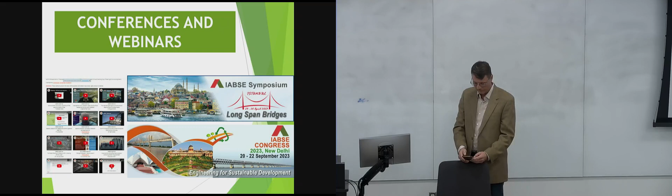We also have, as the US group, some activities planned for that event. There are a lot of technical commissions, 40 task groups, covering performance and requirements, conceptual design, structural analysis, construction methods, existing structures, and sustainability. The association started around bridges. In fact, it's called the International Association for Bridge and Structural Engineering, but it also covers a lot of aspects related to structures which are not just bridges.

These are examples of reports that those commissions produce. So basically each committee has the objective to produce something which is going to be useful for the profession and the research community.

So the Young Engineers Committee is probably what you guys are more interested in. Basically, the good thing is that you have a student membership. You have free online access to the journal, which is very good because the Structural Engineering International Journal is a mix of research and actual practice. So there are good projects actually to go through.

There are monthly newsletters, and the good thing is that you are part of a network, so the platform is pretty good and allows you to connect with other international colleagues. Sometimes you are assigned mentors, and these mentors could be fellows, experienced or seasoned members who help guide you through your career. So this is quite a good program.

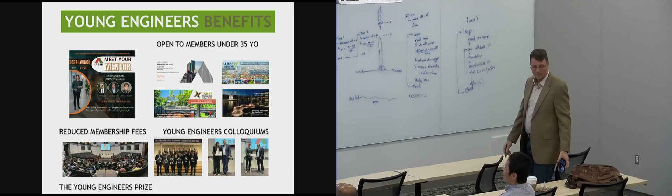You have to be under 35 to be eligible. Most of you probably are eligible for this. Otherwise, you will go into the general category membership type. Sorry, I'm not very good with Microsoft.

These are examples of activities. I think you have to think about that sooner or later, when you start your career professionally, about what are good associations for you. Obviously there are a lot of American associations, but this one has the peculiarity of allowing you to connect outside of the US, because it is an international association, though the headquarters started in Europe, in Switzerland.

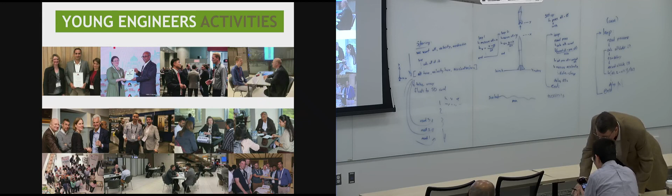IABSE in the US - this is the board of directors. The chair is Maria Grazia, who is Italian. You will see there are more Italians than Americans in the board of directors. I don't know why.

We are actually meeting, and they drag me in as well. We meet monthly and try to organize activities, webinars like this, in order to keep connection with the profession, but also with universities.

These are the activities - usually we also have a national group conference, which is one day, and we also try to organize a very good site visit to a particular bridge under construction. As I said, we also provide a quarterly newsletter. I think this is pretty much about IABSE.

So please have a look at the website. Feel free to email me if you need any information. One of the things I wanted to do as a member is have more activities where we, as an association, go into the universities and try to stimulate the next generation of engineers to be part of the association.

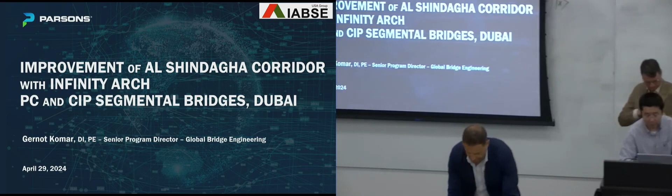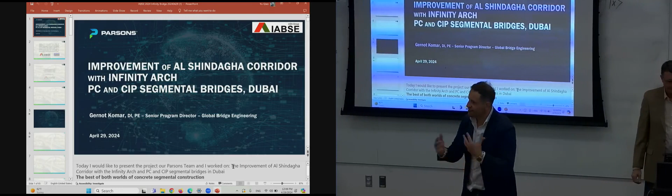Gernot is also a very good soccer player, by the way. Thank you. So we haven't talked about Italy and Austria. We had several recent matches that went well for Austria and well for Italy as well. But yeah, normally we lose against Italy. No, but last time you won. So we always look back just to the last game.

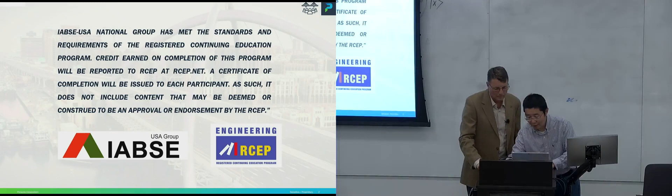All right, I think at home or on Zoom they can see the overview, not the presentation mode. Let's see if this works. I hope it works this time. If not, I apologize for the inconvenience because you can also see the small screen. Actually this is the broadcasting screen. For some reason, let me see if I can move this a little bit. No, I can't, for some reason. It's fine, if you want to hide it you have to go to non-content. Let me move this further over, then it doesn't matter. Maybe I need this so they can see it. No, at home they cannot see this one because they also see the frame. Okay, now I'll move this side, hopefully they can only see this. I don't think so, can you move it back? You guys here are fine, but it's just for the people on Zoom. Doing the hybrid always creates challenges, so sorry, be patient. We don't need to see the screen, do we? Oh, you mean this one? Yeah. This one's always there. Okay, sorry about that. No worries.

Good afternoon, everyone. Today I want to talk about the improvement of the Al-Shindagha corridor with the Infinity Arch, with precast and cast-in-place segmental bridge in Dubai. I say this is the best of both worlds of segmental bridges in concrete—we have precasting and cast-in-place.

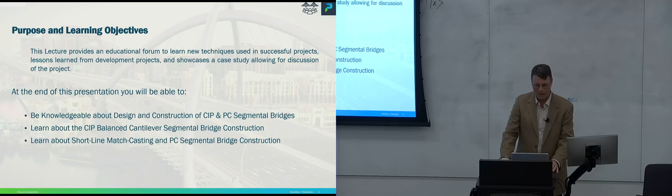Here are the necessary slides to get the PDHs. I will skip this copyright material. Purpose and learning objectives: at the end of this presentation, you will be knowledgeable about the design and construction of cast-in-place and precast segmental bridges. Learn about cast-in-place balanced cantilever segmental bridge construction, and learn about short line match casting and precast segmental bridge construction.

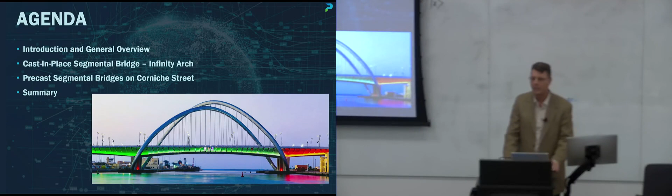The agenda for today: first I will give an introduction and general overview. Then I talk about the cast-in-place segmental bridge, the Infinity Arch. Then the precast segmental bridge, bridges on Corniche Street, and a summary. First, the introduction and general overview.

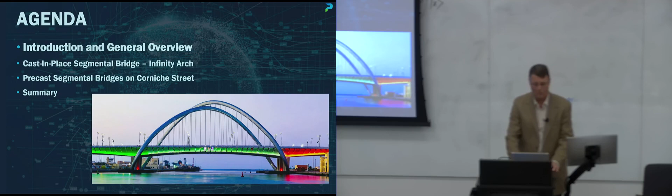Dubai is an amazing place, changing every day almost. You see the project location. It has the Palm Islands, the World Islands, and numerous Guinness Book records, like the tallest building, the Burj Khalifa, over 825 meters, more than 2,000 feet. It has the largest indoor mall, and within the mall the largest aquarium, the largest and longest ski slope, and also the fastest police cars with over 250 miles per hour—that's a Bugatti.

I will zoom in on the project location and talk about the cast-in-place segmental bridges with the Infinity Arch over the Dubai Creek, and then about the 21 precast segmental bridges on Corniche Street.

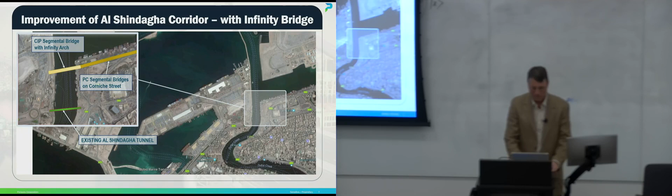Here's a general layout of the improvement project: the cast-in-place segmental bridge on the southwest side with the Infinity Arch, and the 21 precast segmental bridges over Corniche Street.

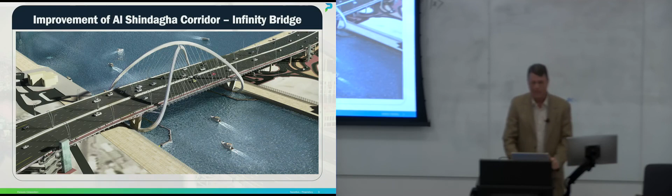The rendering shows the Infinity Arch Bridge, and I want to point out the pedestrian walkway on the south side, where they have ramps on the bottom left corner in order to get over the Dubai Creek, and then further on to the northeast with the precast segmental bridges. Again, you get on and off this bridge with ramps and with an elevator.

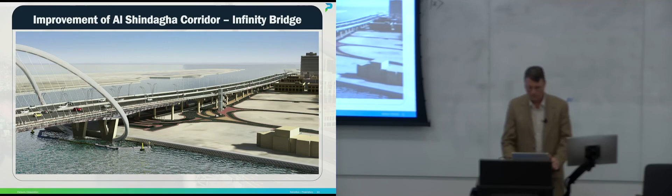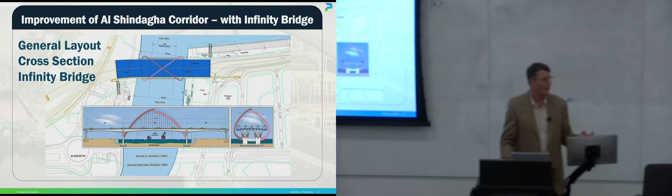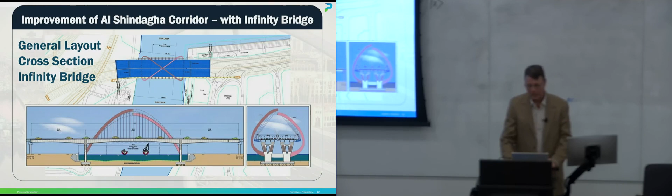And the infinity arch, I want to zoom in a little bit. It's a very unique architectural feature. It's a steel structure, this infinity arch. And the two cast-in-place segmental bridges cross a very unique area.

It's the Dubai Creek. The maritime traffic is very heavy in this area and needed to be open during construction. It's an ancient area of the city, and it's very well received, of course, and it's a gateway into the Dubai Creek. Again, the modern design is just striking and very unique.

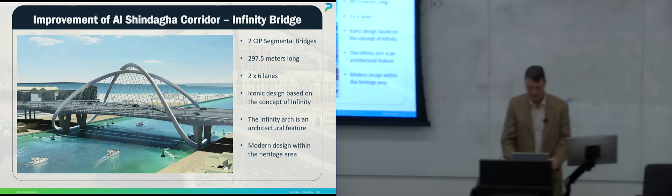The structural type, it's post-tensioned concrete box girder structures, and the span arrangement is 80 meters, 135 meters, and 82.5 meters. It's 297.5 meters, which is about 900 feet long altogether. The navigation channel itself is 75 meters wide and 50 meters tall.

And the infinity arch as the architectural feature supports the pedestrian walkway. The 3.5 meter wide pedestrian walkway is supported off the edge girder on the south side. The bridge width overall is 26.4 meters from south to north, and from north to south changes from 26.4 to 29.3 meters. It's about 90 feet. It's a very wide structure.

It carries on each bridge 6 lanes of traffic, so overall 12 lanes of traffic, which is tremendous and will help the area to move the traffic faster. The superstructure depth is 7 meters over the piers in the center and changes from 7 to 3.5 meters at the center of the span and at the end spans. The maximum height of the infinity arch is 42 meters for the top arch, and for the lower arch is 38 meters.

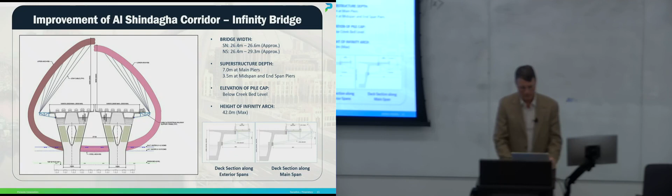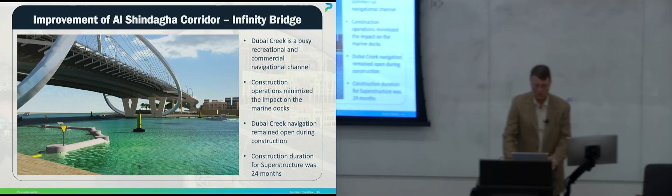The Dubai Creek is a very busy recreational and commercial navigation channel. During construction, it needed to be kept open, which was also very challenging, and restricted the construction method. The construction for the superstructure and also for the pier protection system took about 24 months. Talked about the navigation channel.

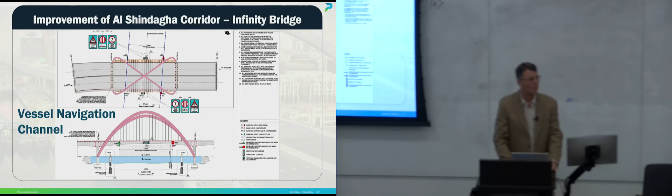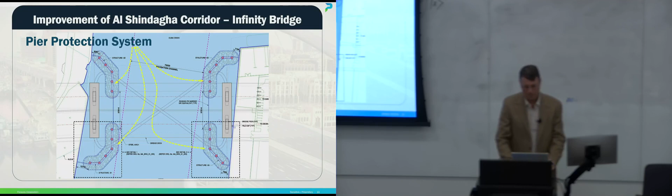As you all have heard about the terrible collapse of the bridge in Baltimore, Maryland, it is very important to have a pier protection system. And this was implemented right from the get-go so that no ships or vessels can impact the piers, which were in the water. Here the protection system and final configuration.

For the structural analysis model for this bridge, we used a 3D analysis model with Midas Civil, and we used it for the design of the cast-in-place segmental bridges, for the infinity arch, and for the precast segmental bridges. The model consists of all the construction stages for the balanced cantilever structures, as well as for the erection of the infinity arch and the impact of the erection of the infinity arch onto the balanced cantilever structure. We considered all time-dependent effects and also all the stressing procedures.

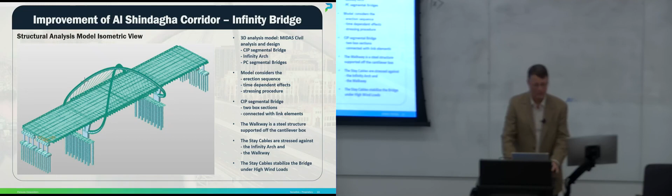I mentioned already the cast-in-place segmental bridge had 2 box sections for each bridge, and they were connected with rigid links. And the walkway, the steel structure on the south side, was implemented in the Midas model and was supported by the infinity arch and by the edge girder. The stay cables were also used to stabilize the bridge under high wind conditions. The plan view of the model.

The design code we used in Dubai was the AASHTO LRFD, the 7th edition, and considered creep and shrinkage and steel relaxation based on CEB-FIP 90. Then concrete material, C65 for the superstructure, C64 for the substructure. The PT strands, 270 grade. The structural steel, grade 50. The rebars, 60 KSI rebars. And also for the stay cables, 270 KSI were used.

Timeline was very important for that structure and actually drove the project. For the cast-in-place segmental bridge with the infinity arch, the contract was awarded in May 2018, and already in November 2018, the cofferdam work started, with all the substructure work in May 2019, all the piers, the pier protection system, and it took about 10 months to finish it.

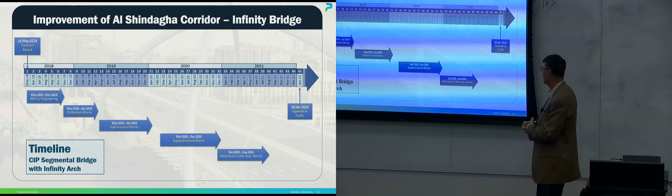The form travelers were installed from January to March 2020, and the superstructure finished in December 2020. Then the work on the steel arch started in December 2020 and finished in August 2021. And the bridge opened on 16th of January 2022 by Sheikh Mohammed. It was a big celebration.

The substructure and the 4 center piers, including the pier head, took about 5.5 months. Every pier was on average 22 meters tall and was cast in 4 lifts. And it took about 2 months to install 16 form travelers. We'll see later what the 16 form travelers look like. And of course, all the form travelers were load tested, which is a standard requirement.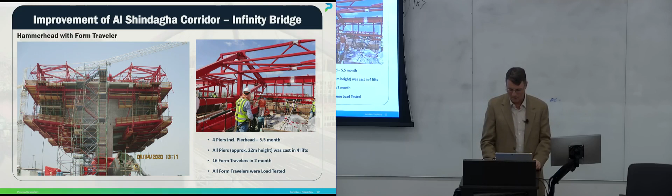Here's a view of the balanced cantilever structures under construction. And you can see already the 4 box girders for the 2 bridges with the 16 form travelers. You see 4 on this side, 4 on the other side of the balanced cantilever structure, and the same on the other side. It was very challenging during COVID to get this going so fast and have also the right

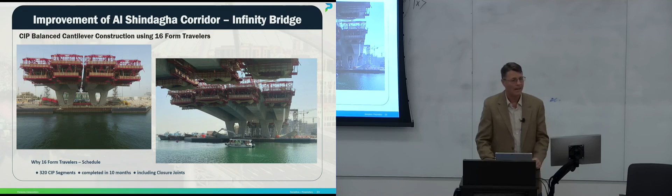workforce available. We had 320 cast-in-place segments, and it was completed in 10 months, including all the closure pours. So a cycle time of about 10 days was achieved, and we were able to reduce it later on to 6 days. The length of each segment was 3 meters, and it was very challenging with the resource loading to get the workforce on there. The question was how to place the concrete, and of course it was a staggered

operation. So we had 16 work crews with 20 workers, with fitters, carpenters, operators, etc. And they were working always overlapping. So the process is you have the form traveler on there, you place the form traveler, then you need to get the rebar crew out there to place the rebars in the form traveler. Then you start pouring the concrete, come back with the inner forms. Then you finish the pour.

Then you insert the post-tensioning. After it's hard and cured, you start then the post-tensioning operation. And after everything is in order, you are able to move the formwork further to the next step. And this all needed to be organized. So we couldn't pour the concrete all at the same time. So we needed to start pouring concrete for one of the sections, then next day for the next section, and

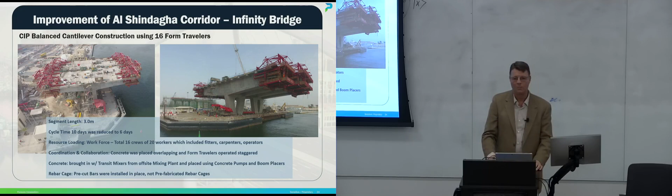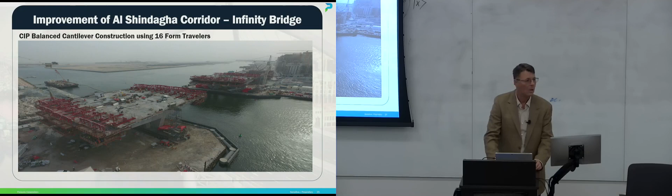so on. We had 16 different locations where we needed to place the rebar, pour the concrete, put in the PT stressing, and then move the form traveler. So the crews needed to be coordinated, and there was a good collaboration. It's a very, very wide structure. The structure is 26.4 meters wide times 2, and for 12 lanes of traffic.

The concrete placement was done mostly during night; you can imagine Dubai is pretty hot. So the maximum temperature during the night when the concrete was poured needed to be below 35 degrees Celsius. So it's close to 90. And we also performed the geometry control always in the morning, where the average temperature was about 30 degrees Celsius, because then the movement of the cantilever arms was always the same, it was controlled. The closure pour 1.5 meters, and I mentioned earlier the segment length 3 meters.

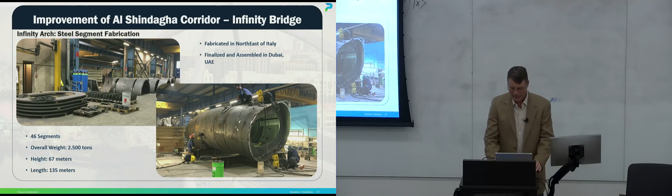The infinity arch itself was fabricated in your home country, in Italy, northeast of Italy. It was then finalized and assembled in Dubai. There were 46 segments. The overall weight of the infinity arch was 2,500 tons, with an overall height from the bottom to the top of 67 meters, with a length of 135 meters. And it was shipped from Italy to Dubai, and the steel segments were then transported to the site using SPMTs. And then the segments were lifted with 600-ton crawler cranes on barges. The longest segment was 41 meters long and 100 tons heavy.

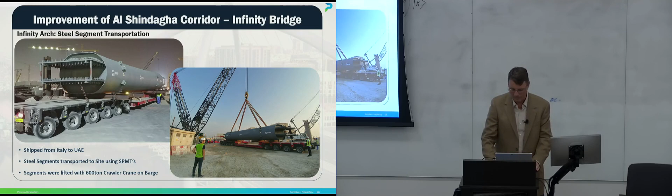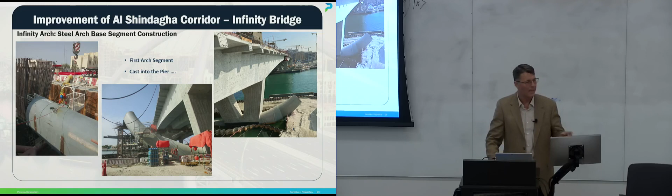Okay. So the placement or installation of the infinity arch: the first steel segments were lifted and embedded in the rebar cage, and then cast into the piers, and then built all the way up to the deck level. Then the deck was finished. Later on around the deck, we had 4 towers in the water, and then 5 towers, 35 meters tall, on the deck of the balanced cantilever structure.

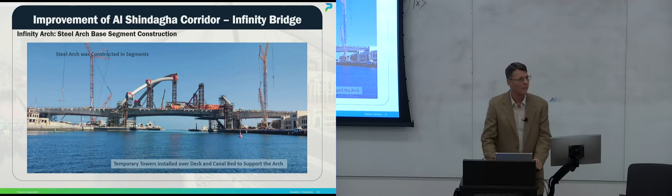And all construction stages and sequence were checked, and the deck was checked to make sure that all the service checks and strength checks were fulfilled, and the structure is sound and safe. These are the construction sequence with the last segment brought in, and then the arch was finished, and the final segment, the tolerance, was only 20 millimeters, less than an inch.

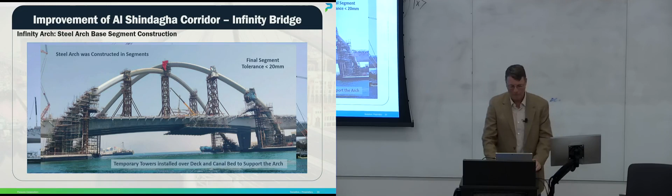Well, VSL installed the stay cables for the arch, where 46 cables were installed, and it took about 5 weeks for the whole process. And here the stressing procedure with the VSL professionals.

Also for that structure and for the cable system, a maintenance system with a robot was installed with a magnetic NDT machine with separate laptop, which will also detect internal and external broken wires, corrosion, grooves, and notches. There were 4 visual inspection cameras on that machine, which detect external defects. And then this machine also had a brush for cleaning the HDPE pipes.

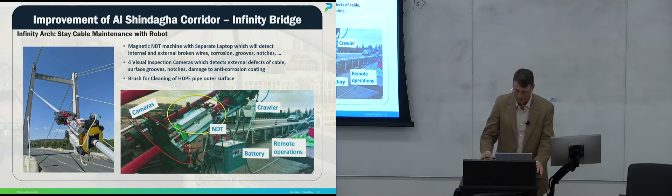I want to give credit to a lot of contractors on this one, and of course the owner, Roads and Transport Authority in Dubai. The designers are Parsons, and the contractor for the cast-in-place segmental bridges was Besix Group's Middle East subsidiary Six Construct. Then Parsons did also the construction engineering services and inspection. The form travelers for the segments were from NASA Structural System in Australia. The same with the post-tensioning system. The bearings from Mageba, it's also a European outfit.

Pre-packaged grout from Sika, the Infinity Arch from Maeg SpA in Italy, and the stay cable from VSL Middle East in Dubai.

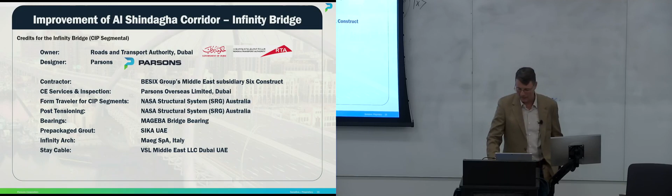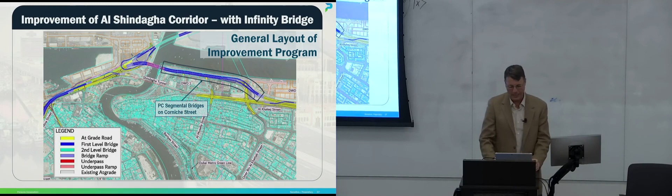Let's move on to the precast segmental bridge on Corniche Street. For this one, here's again the general layout for the precast segmental bridges on Corniche Street. We had 21 precast segmental bridges, and then also 3 cast-in-place bridges. For the section variations, it was easier and cheaper to get cast-in-place bridges in there. For all the other bridges, we used precast segmental.

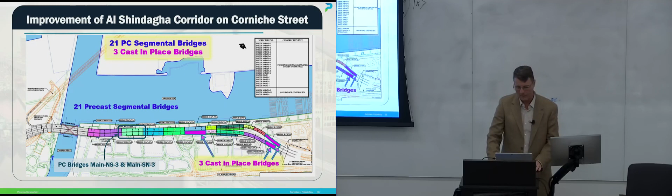I want to focus on one of the bridges. It's the main north-south 3 and main south-north 3. This is a typical structural layout with a span length of 34.6, 2 times 50 meters, and 34.6 meters. The bridge width for all the precast segmental structures was 26.3 meters with a 1 foot or 0.3 meter stitch. And again, of course, 6 lanes of traffic in each direction.

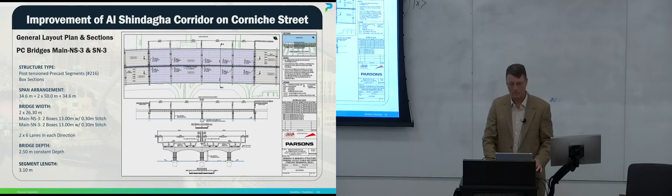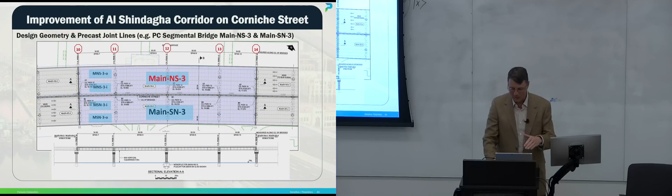The overall depth of the structure was, for the precast segmental structures, 2.5 meters. The segment length 3.1 meters. I want to focus again on these structures on the north-south and south-north, and then separate the outer north, the next one, and so on, because we needed these structures to model also for the geometry control. We used this for the entire construction stage analysis and also for independent design check of the designers.

And here you see color-coded the different segments for the precast segmental layout, because the segmentation needed to be precise. We have starter segments, which are end piers and the pier segments, then the balanced cantilever segments in green, and then also the span-by-span segments based on direction method.

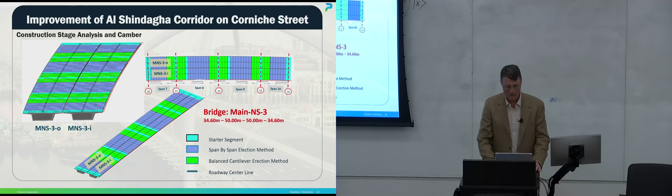Geometry control of the short line match casting. We used the short line match casting for the precasting, and geometry control is a very important component for precast segmental bridge technology. With the short line match casting, you can form any structure, any layout, any alignment, vertical curves, horizontal curves, and also change the superelevation. The geometry is defined for every precast segment in the precast yard, and every segment is unique. You cannot interchange one segment with the other. It's match cast to each other. It's like a jigsaw puzzle.

We used for the geometry control a total station with a precision of 0.6 millimeters, and the geometry control accuracy in the precast yard was less than 2 millimeters.

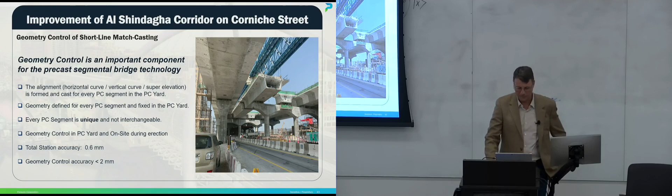Here, the short line match casting, the general concept. On the left, this is the fixed bulkhead in the back, and then the side forms, the inner forms, and then the sliding table. On the right-hand side, you see the different segments that were already produced. The first segment in the front is the segment ready for the storage area. The next behind is the segment ready for patching. And then this is the match cast segment, which will be used, as I said, as match cast for the following segment, the wet cast segment.

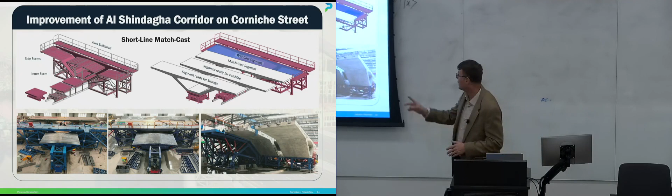So after this is cured, you take out the forms, you push everything out, the match cast segment will become the segment for patching, and then the wet cast segment will become the match cast segment, and so on. So you produce slice by slice, and everything is cast together. It matches. At the bottom, you see the processes again, with on the left side the form with the sliding table. The second in the middle shows the segment cast, and on the right side, the segment for the precast yard, for the storage area, and for the patching area.

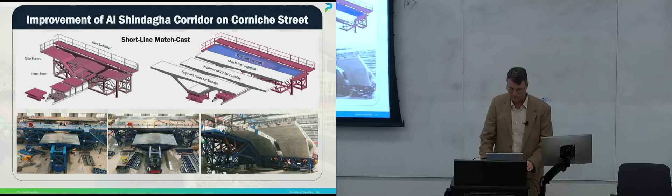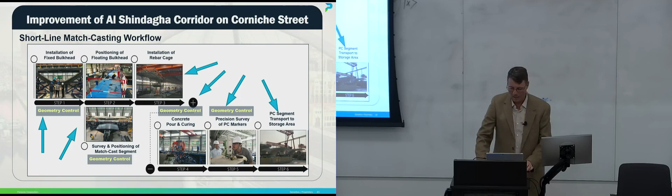The short line match casting workflow. Everywhere and every time you need the geometry control: for the installation of the fixed bulkhead, then for the positioning of the floating bulkhead or the match cast segment, then of course the installation of the rebar cage, then you pour the concrete and let it cure, you put in your markers, then the precision survey of all the precast markers, and finally, after everything is done, you shift the segments to the storage area.

We used a product where we had a precision survey. Everything was automated. So we had a survey app. The survey app had all the data for each segment. It was transferred to the total station, performed the survey in the precast yard, and after that the survey data were given back to the platform, processed, QA/QC control, and then sent back to the surveyor to give them an okay to go to the next segment with all the corrections of each segment.

So this whole process is completely paperless, and we were able to perform all the geometry control remotely. So the geometry control team was not on site. We did not need to be there. We had only our surveyors there, and they sent the data. So we processed the data in the United States or in China, wherever you are, and then you send the data back, and then they can start over with the next one. It really helped to reduce the workforce on site during COVID.

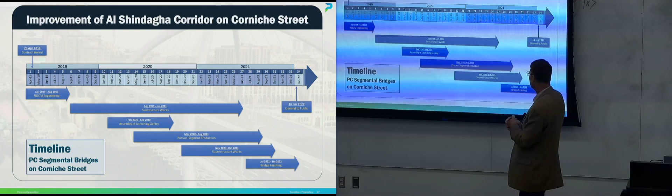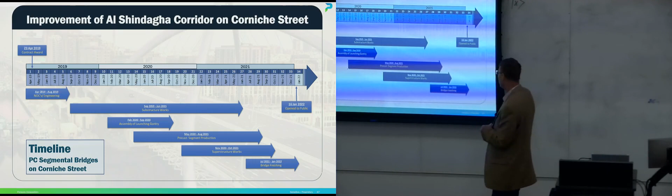The assembly of the 2 launching gantries started in February 2020, finished in June 2020, and was also load tested. The precast segment production started in May 2020 and took a little longer, over a year and a half for the casting or fabrication of the precast segments. We had 1,900 precast segments, and the superstructure work, the installation is pretty quick actually. From November 2020 to October 2021, it's about 12 months.

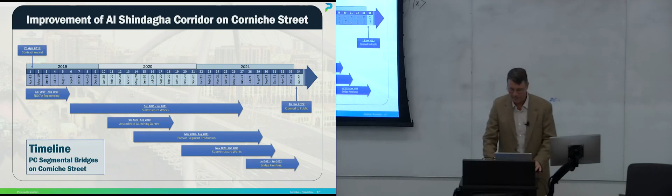And the bridge putting up the finishing touch up to January 2022. And again, big surprise, same date. Bridge was opened in January by Sheikh Mohammed.

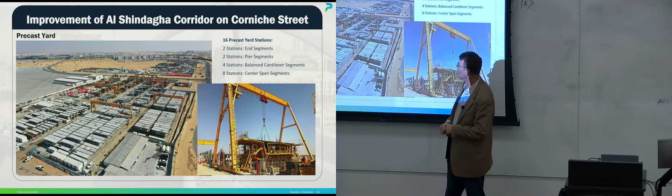The precast yard itself: in the front, you see the storage area, and on the right side, one of the gantries on rail, then one of the cranes on rail, then one of the bigger cranes or gantry cranes. The stations we had on the very left side, right side, 2 end stations and 2 pier stations. Then adjacent to it, 4 balanced cantilever segment stations. And then the next one we had 2 times 4 stations for the center span construction.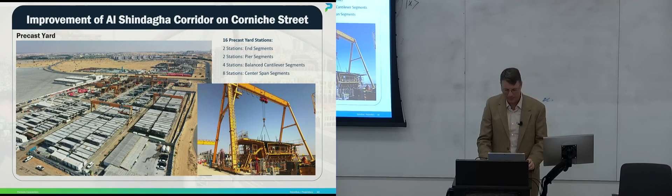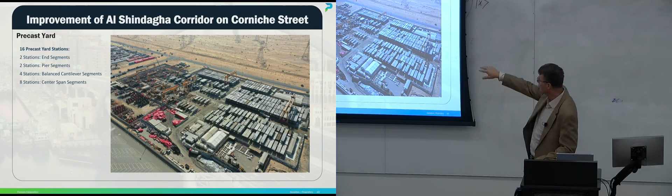The segment weight for each section, the average was 55 tons, up to 160 tons for the end segments and pier segments. And the rebar cage production in the back, it was on a rebar jig. All the rebar cages were prefabricated and then lifted with 8 gantry cranes on rails into the forms. The capacity of these cranes was about 20 tons. The heavy lift cranes were about 160 tons to move the regular segments into the storage area. Here, an overview of one of these gantry cranes for the heavy lift.

The transportation from the casting yard to the site was also challenging. It was over 30 kilometers. And we had about 25 of these special vehicles, transportation mostly during night. And all the structures along the transportation route needed to be load tested, all the bridges, because we weren't allowed to overstress their transportation facilities.

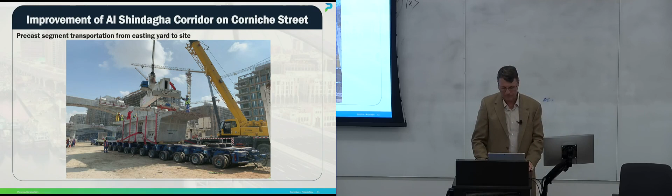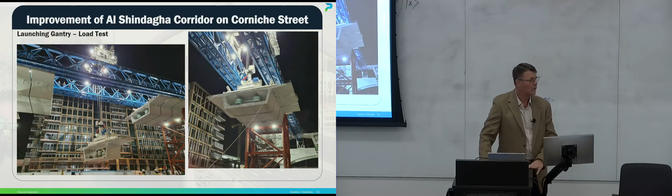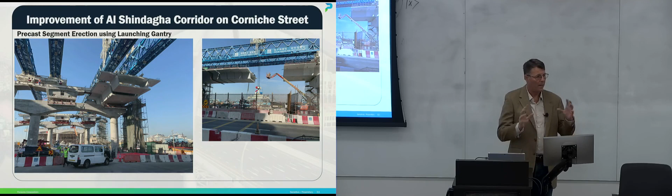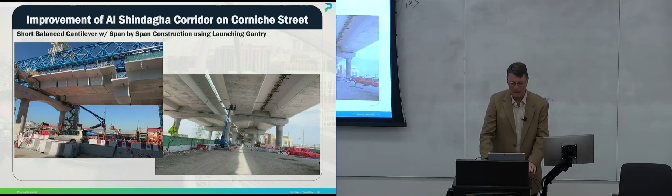Here are some construction photos of the precast segmental erection. This is the load test of the launching gantry. It was load tested to 900 tons. Then the erection sequence, again, it started placing a pier segment, adjusting the geometry exactly, and then the balance cantilever arm on the side. Again, balance cantilever arm, and then the span-by-span construction with the launching gantry. The launching gantry was then shifted sideways for the next bridges.

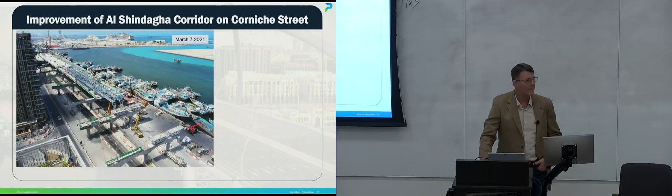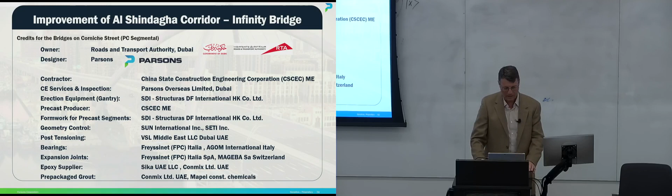I want to give credit, of course, again, to the owner, Roads and Transport Authority, and Parsons, the designer. The contractor for the precast segmental structure was China State Construction Engineering Corporation. Parsons did the construction engineering and inspection. The erection equipment, the gantry, was designed and erected by SDI. The precast producer was China State again. SDI also produced the formworks for the casting yard. Geometry control was done by Sun International. VSL provided the post tensioning, bearings by Freyssinet, also the expansion joints, epoxy supplier Sika, and the grout material by Conmix.

Summary. For the Infinity Arch, or the segmental structure, we used about 32,000 cubic yards of concrete, 5,000 tons of rebar, 42,000 meters of PT strands, and 320 segments. For the precast segmental bridges on Corniche Street, 91,000 cubic yards, 15,000 tons of rebar, 145,000 meters of PT strands, and 1,900 segments.

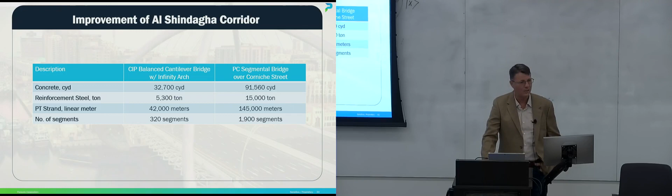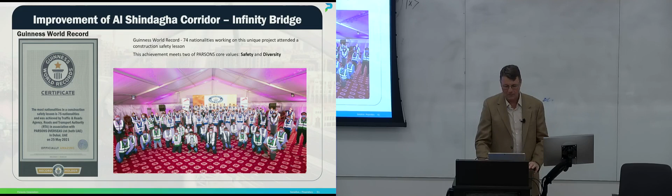It's also Dubai and Guinness World Records. We also achieved one of these records with one of the safety meetings. We had about 74 nations attending this meeting. And this is also one of Parsons' core values, safety and diversity. So we needed about 50 nations, got 74.

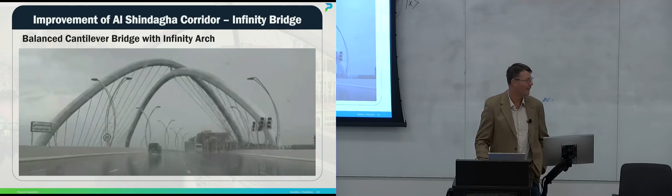Some final pictures during construction. The Infinity Arch, and I hope you heard about the weather they had 2 weeks ago. They got the rain for 2 years in one day. And Dubai was floating and flooded. The Infinity Arch was okay. Well, here one final picture.